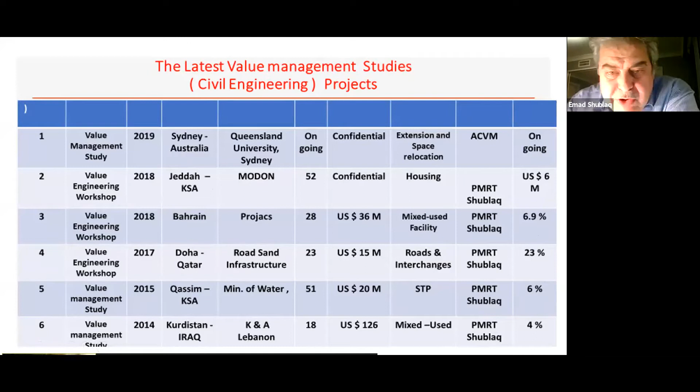And these are the percentage savings we obtained: 6.9%, 23%, 6%, 4% - these are the savings we achieved through value engineering. To do value engineering in Australia, you have to be registered with a panel, called the New South Wales panel, SMC 1191, category 328, to become a value management facilitator.

To start with, I can't see my audience from here, but I would assume there are some novices, some beginners, and others who are professional. So I would assume there are some people who know nothing about value engineering, so I would start from scratch.

Value engineering can be defined as a methodology, a systematic process used by a multidisciplinary team to improve the value of a project through the analysis of its functions. What does it mean? Instead of looking at elements, we go for functions, and we will see examples coming soon. This is specialized work with the team focusing on what functions are doing in the buildings, the projects, or the items. So we have another definition here: a specialized cost control technique.

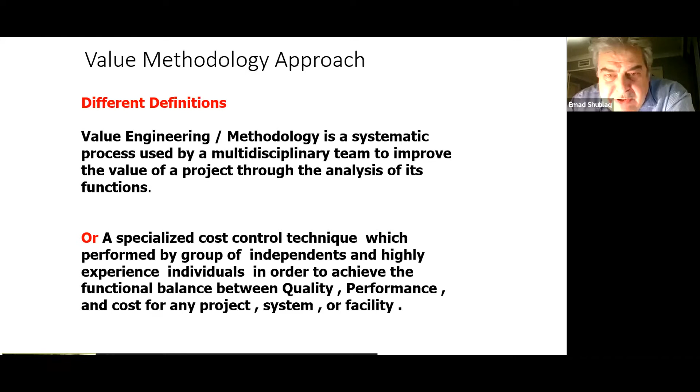Again, value engineering is not a science like mathematics, chemistry, or physics, neither is it like chemical engineering or mechanical engineering. It's performed by a group of independent and highly experienced individuals - we consider those guys a third party to check and examine the validity of the design and the quality, in order to achieve functional balance between quality, performance, and cost for any project, system, or facility.

So to understand value engineering for those who are new to this field, you have to understand the pillars, the 5 main questions in value engineering. These are: what is it? Question number 1, what is it? When we say what is it, I need a full description of the item. If it's a column, you have to tell me it's a concrete column, structural column, circular section, square, rectangular, 40 by 60, made of concrete, and so on. So you're going to give me a full description of the item. If it's HVAC, an air handling unit, air chiller, plumbing, you should describe it fully.

The second question is: what does it do? When I say what does it do, in value engineering language it means what is the function? Why did the designer design this item? What is the purpose, what is the function of that item? So if we go to the example of the column, what does it do?

Column carry load, support load. In value engineering language, we use verb and noun, just two words, no sentences or paragraphs. Very simple: if we have a car, what does it do? Transport passenger. Pen, make marks. Air conditioner, control temperature, etc.

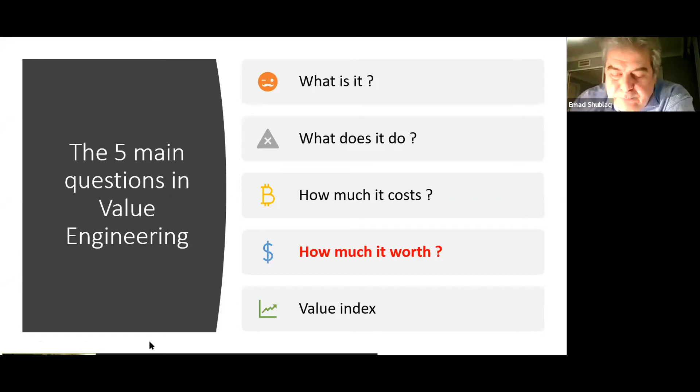At the decision making stage, we check how good or bad the design is. Is it successful or not? Is it feasible or not? So we have attributes: return on investment, break-even point, payback period, and internal rate of return. These are the 4 attributes or indicators which tell us from the early beginning if we can go forward as a feasible project or not.

Once we finish that, we move to the second stage, design and construction, and value engineering fits here during the design stage. We have 3 stages: conceptual design, which poses something like 30% or 40% of the design, then schematics up to 60%, then design development up to 90 or 99% before bidding. So that works the impact or validity of value engineering at that stage, at the design review.

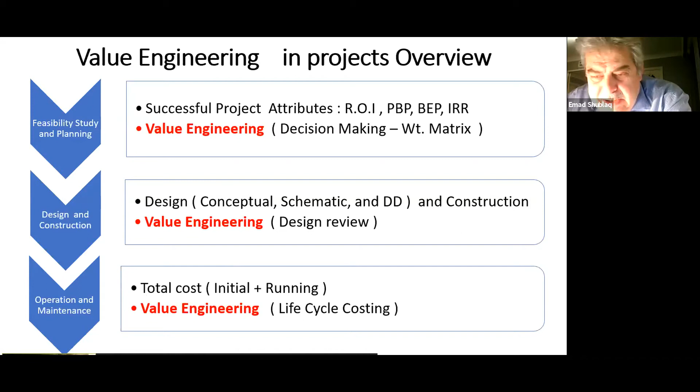Finally, we go to what we call operation and maintenance. For the total cost, we have initial and running costs, and value engineering can be used at life cycle costing. We check during the running course any replacement, maintenance, or repairs. It can be added or avoided during the study.

So let's take an example here, an electrical cable. What is the function of that electrical cable? Conduct electricity. The function is, as we said, verb and noun, conduct electricity. So the original design was copper wire, and the cable at that time cost 5K per ton dollar. So what is the worth or the alternative? The alternative is aluminum wire, which does the same function, conduct electricity, but it costs 4K per ton.

So when we work out the value index here, it is function worth divided by function cost. 4 by 5 gives me 0.8, which is close to 1. Okay, so this is the value and the value index.

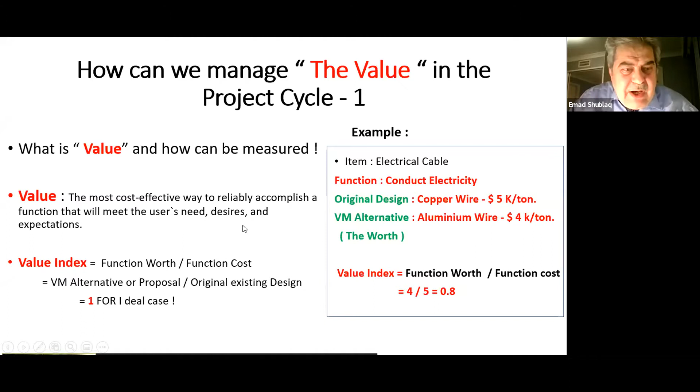How can we manage value in the projects? We have to choose the right team. This value engineering team, for any project or study, has to be headed by what we call the team leader, who has a certified value specialist designation. This is the post-nominal by the United States American Society of Value Engineers, while in other places like Australia they call it value management facilitator, or in the UK and Europe, professional in value management, or value manager in Japan, you name it.

But this is the head or team leader, who works with team members like mechanical engineer, civil engineer, structural architect, and cost engineers, coordinating with clients.

The first step is the information gathering phase, where I, as team leader, ask the client who hires me to provide all the information which supports the study, like drawings, price, bill of quantities, geotechnical reports, environmental reports, copy of specifications, copy of contracts, permissions, anything that relates to the project.

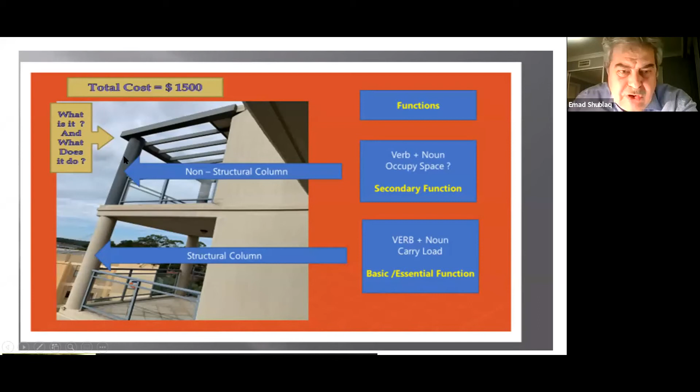In another solution we'll see, because this one is non-structural. This one is okay, we agree it is structural - it carries horizontal and vertical load, but this one does not. So maybe using value engineering alternative solutions, we could have avoided these columns, and gone for an L-shaped supporter, fixed through nails or bolts and nuts in the wall, or through dangling cables. As long as this is not heavy stuff and just resting on that area, it's not a column here.

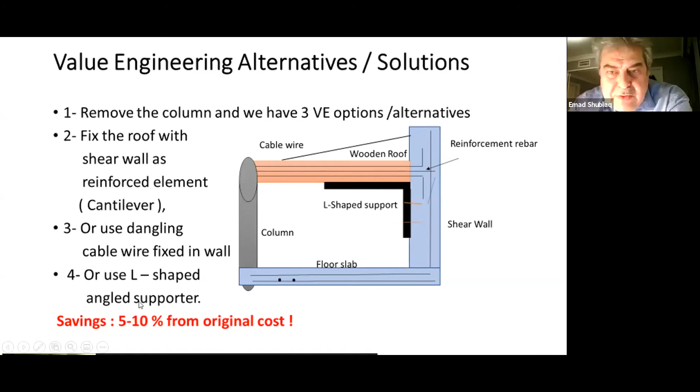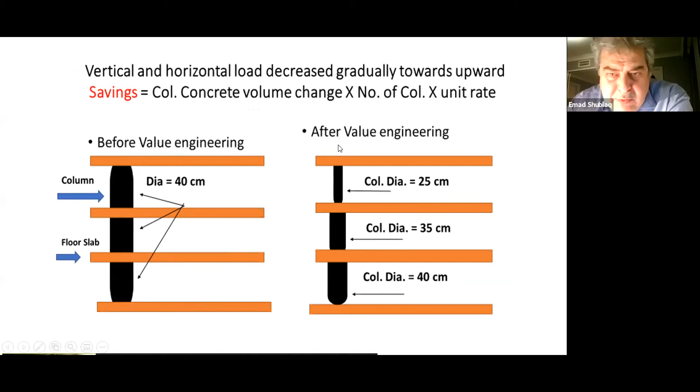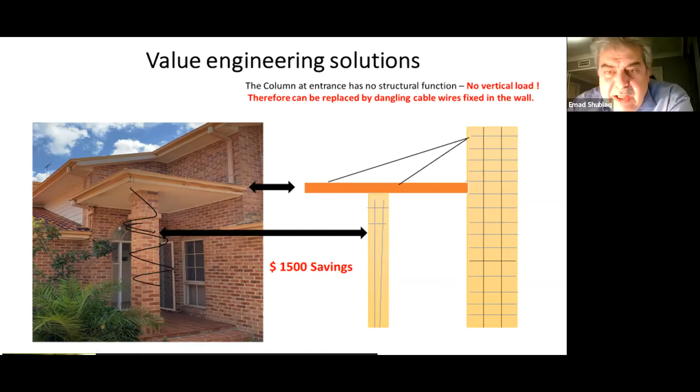Even it's precluding and blocking anybody coming from outside who wants to enter with heavy stuff into the house. So these are the kinds of designs we are facing. This is what I'm talking about, you see - it can use cables like these, and carry this kind of pergola or elements. No need to place or implant columns which will deform or defile the shape of the buildings.

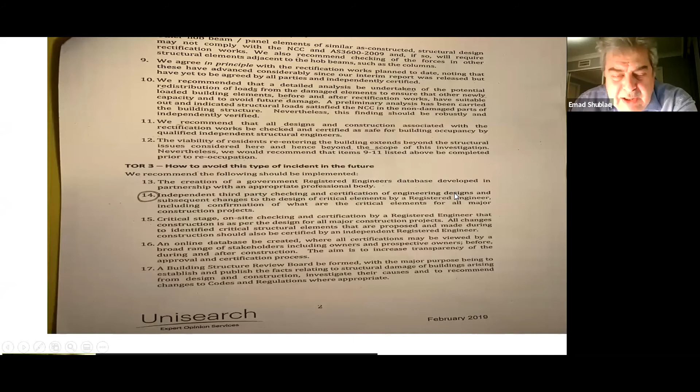This is a case study I used to study, in Sydney, for Opal Tower. It's a high-rise building where there was a problem in floors 4 and 10, and the tenants started to leave the building when they felt it was unsafe. It's a big story - you could go to the internet and find out - but my concern here is to show you clause 14 of the final report, which says we should assign somebody who is third party to check and certify the engineering design, which means value engineering.

The final few slides are regarding certification and qualification for value management or value engineering. You have to have some courses and study to be qualified for these kinds of certifications to practice in this country.

All over the world, we have two schools. One is in the United States - they call it SAVE International, the Society of American Value Engineers, which awards certificates like AVS, the old one. Now they change it to VMA, Value Management or Value Methodology Associates, and CVS, Certified Value Specialists. This is on one hand. On the other hand, in Europe, Asia, Australia, they have another post-nominal recognition: training value management, value analyst, value methodology facilitator, and different ones.

Now, the most important slides, which are our concern today, is during the crisis, during COVID-19, what was the creativity imposed or related to value engineering.

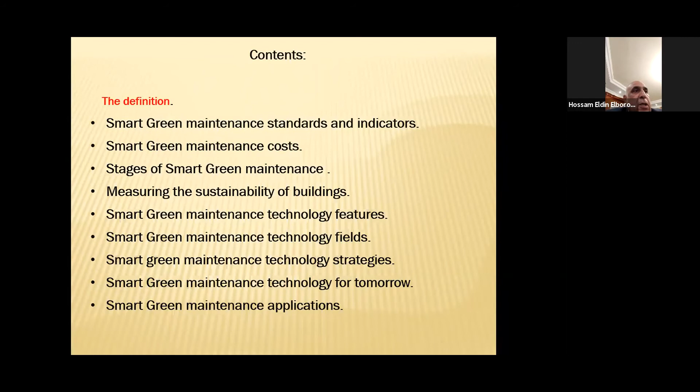We will show the definition. It means green maintenance is a composite of three words: green, maintenance, and smart. Green means that maintenance is free from using anything harmful to the environment, whatever building material is used to replace as a result of damage, and the connection of elements calls for the use of health maintenance tools that are far from any manufacturing product that violates the environment. Smart green maintenance is a desirable and modern method with high technology.

Desirable interaction and dealing with its requirements in order to improve the preservation of existing or heritage buildings, and it preserves the environment as well as security and human safety, and it is applied to buildings, whether residential or other uses.

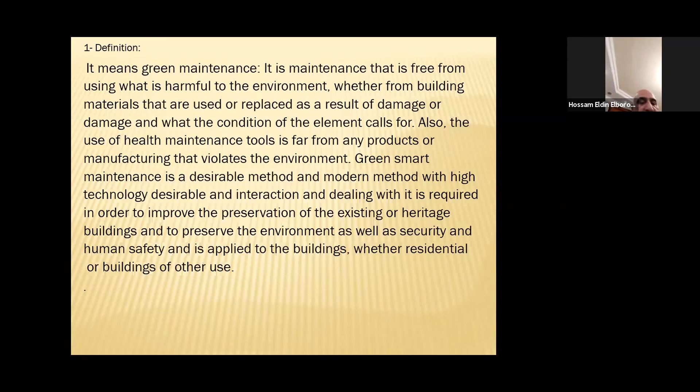This is very important, to use smart maintenance. If we talk about a building, it's like a human being. It can help, it can feel, it can exist, but it doesn't give us an impression like a human. If you feel harm, you can express it by voice or sound or feeling, but for a building, no. But with the smart dimension, it's the use of the age of technology.

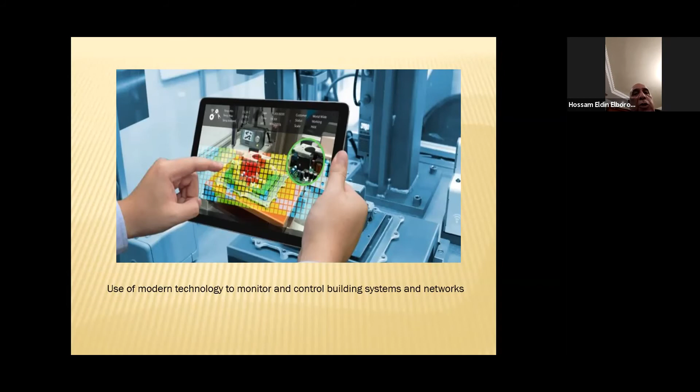Can you give the second slide? In the highest form of application, the value and performance of any components can be determined, whether it has validity, and when it can be replaced or improved.

Smart dimension is one of the innovations of the current era where technology and computers are used. In various programs, we can use BIM, building information modeling, to put all the data of the building and know each part by giving a signal or a word that there is harm in this part of the building.

The smart maintenance system follows high efficiency and quality software to achieve operational accuracy and also adjust it. From that, you can measure every part of the building to know the performance, what percentage of performance the building has, and guide operating economics.

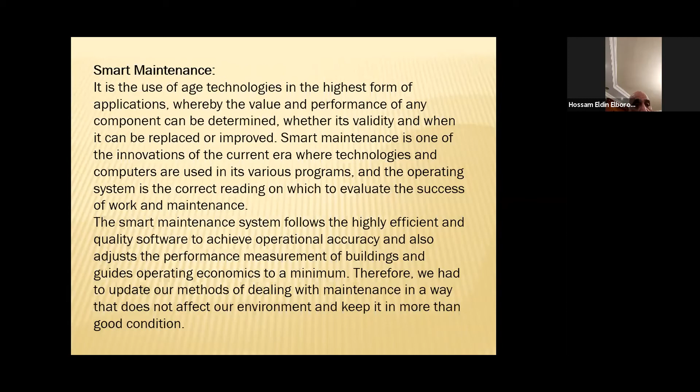Hello, we don't hear you. Information and various... Hello? Yes, you are with me.

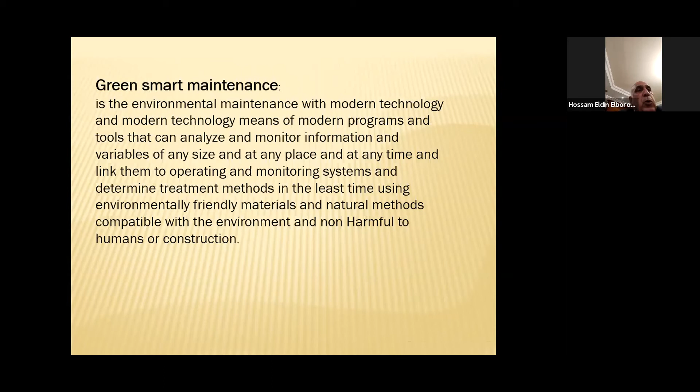And treatment methods, in the least time using environmentally friendly materials and natural methods compatible with the environment, non-harmful to construction.

The principles of smart maintenance, which are very important to talk about, are summarized as follows: developing a system to maintain and read performance indicators for all systems and building elements using a computer.

This computer can be mobile, an iPad, or a desktop screen, using personal mobile devices. Focusing on the system and determining operating capacity, safety, and economy are the main criteria.

Consider design constraints. Continuous reporting and follow-up are essential for improvements. Any unsatisfactory performance means maintenance operations must be carried out on a logical basis.

I give here a short principle of smart green maintenance. That means if the building is smart for the structure, for using energy and electricity and HVAC, also for materials, smart environments, smart for management facilities and control - smart maintenance means it will be a good matrix to control the smart green maintenance.

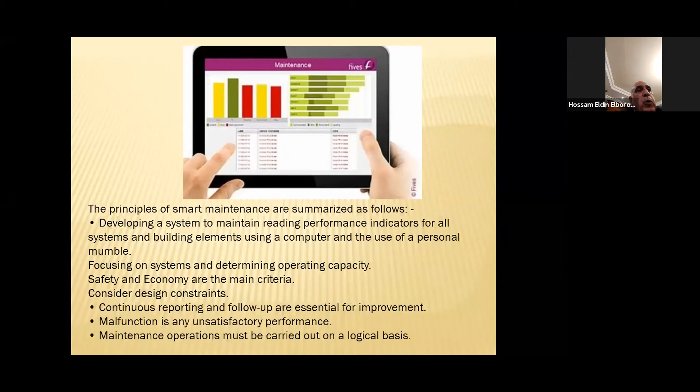These indicators, second slide please. Second, indicators for measuring the performance of smart green maintenance quality.

These indicators for measuring the quality of smart maintenance performance are the tools through which the building's life can be known, and its implication for its residents. The indicators define the dimension that determines the activity of the building after its maintenance, and also define the method of maintenance.

Let's stop at this point. We talk about smart green maintenance, which should start first at the design stage. We can use all this data and give it to the consultant to consider when making a design. At the first submission of the work, we have to control that.

And after that, the third stage is for operation. This intelligent performance measurement indicator can help with the useful life of building elements, operation economics, maintenance plans and operation methodology, smart uses, and quality control.

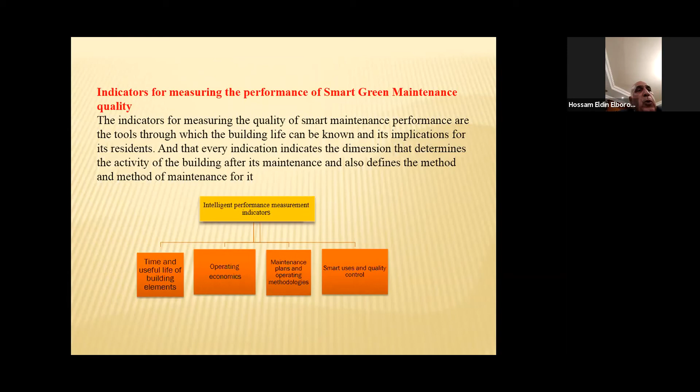Second slide, we talk about green smart maintenance standard and indicator. When talking about smart maintenance and green maintenance, there must be criteria to measure its performance. This topic has been addressed by many research centers, and the evaluation systems such as LEED and BREEAM, the indicator for measuring performance for smart maintenance.

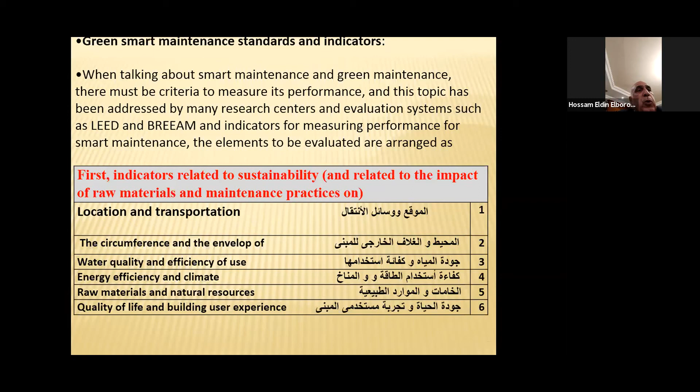The elements to be evaluated are arranged as first, indicator related to sustainability and the impact of raw material and maintenance practice on location and transportation, the circumference and the envelope of the building, water quality and efficiency of use, energy efficiency and climate. All these elements can be effective for the building, and also as items for maintenance: raw material and natural resources, quality of life and building user experience.

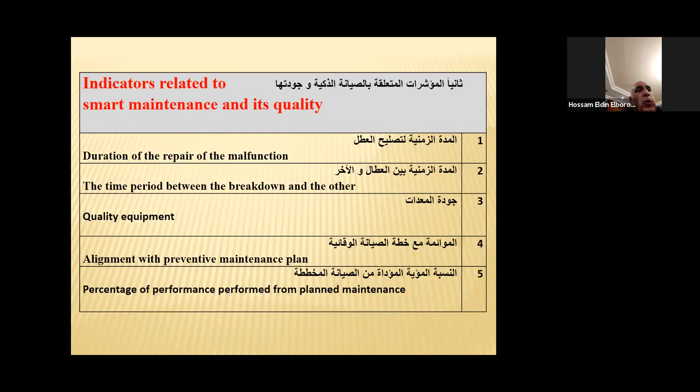Second, indicator related to smart maintenance: its quality, duration of the repair of the malfunction, the time period between the breakdown and others, quality equipment, alignment with preventive maintenance plan, percentage of performance performed from planned maintenance. All these items can be effective for the costs.

And we talk about green smart maintenance costs. Innovation technology in a smart building greatly reduces operation and maintenance costs, thanks to their ability to collect and analyze data, which was previously inaccessible. In addition, the sensors placed...

That means we can put some sensors for all the infrastructure and the connection to know and measure the performance. This can be automatically programmed in maintenance activity, which...

prevents failures. Predictive maintenance is 3 to 9 times cheaper than any intervention after damage has already occurred. Moreover, with smart building management techniques, owners are informed of potential problems before the equipment actually fails. That is, an alarm gives a sign before any problems occur.

Can ordinary citizens deal with the maintenance for smart buildings? That's very important. That means it's not only for professionals, but any ordinary citizen.

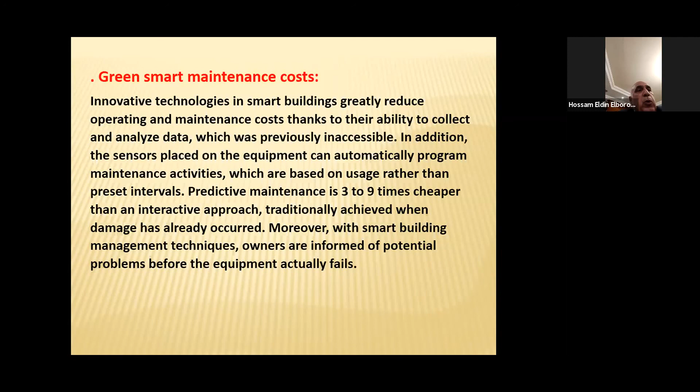searching for information to solve the problem, thanks to thermal imaging or infrared. For example, the building manager will be able to detect any device that is outside the temperature range. This data can be easily discovered in advance.

That means it's preventive maintenance starting from this point, not corrective maintenance. That is a problem for the meaning, because now all the people work with correcting, not with preventive maintenance.

Before the device cuts out of the system, another example is ultrasound detection: electric transmission lines which have holes produce ultrasound. This can happen unnoticed in normal situations, but with IoT technology, technicians can easily locate the exact location that needs maintenance intervention.

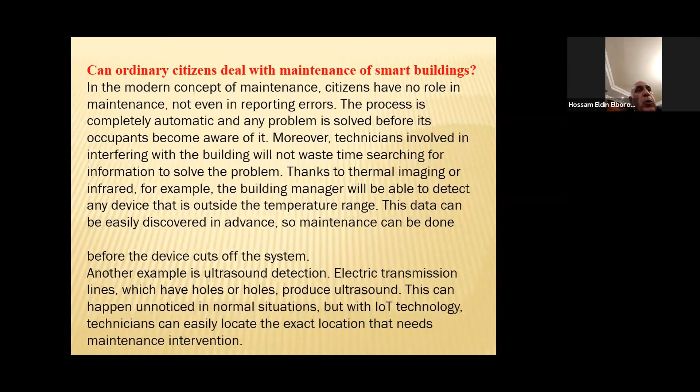Having said that, it is also true that the success factor in technology innovation lies in the degree to which the users accept it, as it affects their daily lives. So it is important to engage users early and familiarize them with the smart technology to be implemented.

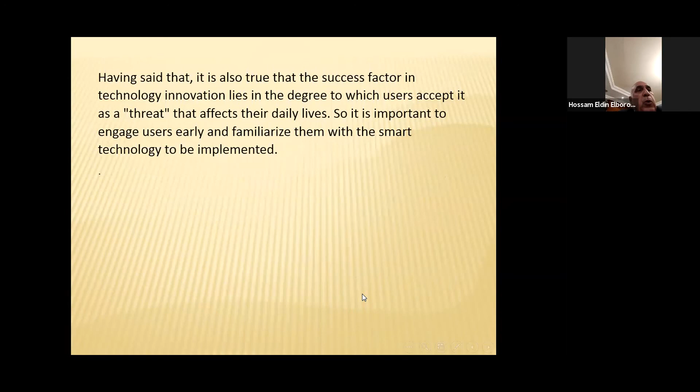We talk about the stage of green smart maintenance, connecting buildings with a communication network. In this step, most building data will be transferred and prepared so they can be accessed through smartphones and computers from anywhere and anytime, outside the building. You can control the maintenance and get the data from far away.

We start this step by converting the building system into an electronic control system. Modernization is the approach that must be followed, and we cannot continue to build smart and modern buildings and wait for them to be replaced.

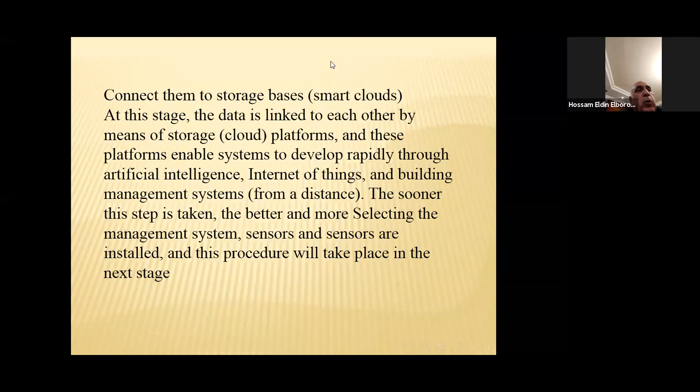Yes. Thank you, Hossam, because time is really over. Thank you. As a moderator, I would like to say 2 minutes. You have 30 seconds, it's okay.

I have to, yes, 30 seconds of course to give closing remarks. Here's a strategy: if you go through the slides for a strategy of technology, the smart green maintenance, we talk about the technology completely based on a group of materials that is for the green, and for the smart, using the computer and everything related to the calculation.

And we are going to talk about green smart maintenance technology for tomorrow. This is very important to put in the future, to take care of these assets and to take care of your costs. And there are so many applications. Thank you very much, but this is a pioneer.

Thank you to you, we're out anyway. Thank you to you. Just one consideration for the excellent presentation of Emad, that is putting our attention to consider the value of the facility. And I would like to add not only the design value, but Mr. Franco...